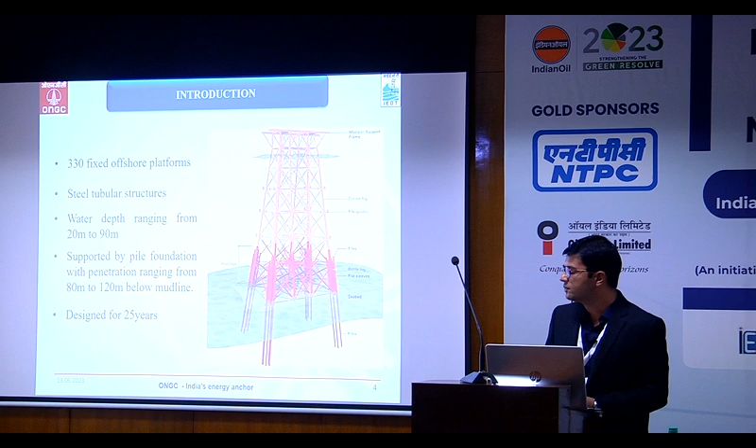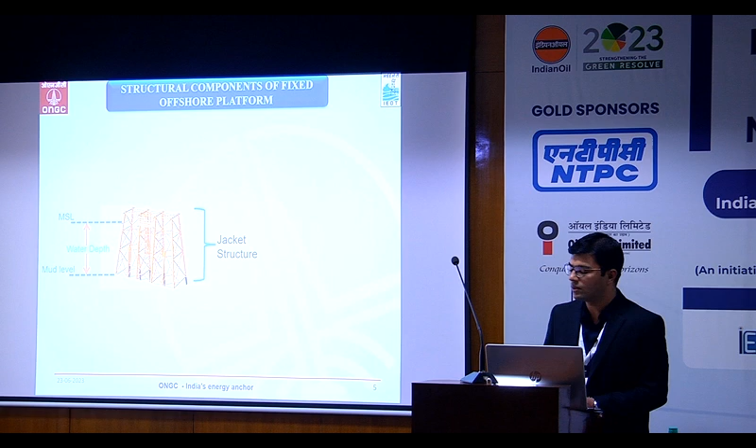Fixed offshore platforms are having three main components. The first one is the jacket structure, which is placed on the seabed. The second one is pile foundation system driven below the mudline through the jacket legs to achieve the requisite capacity. And the third one is the deck structure, which is placed on the top of the jacket structure. So this is the 3D model of offshore platform generated using SACS software. These jacket structures are designed for 100-year extreme storm conditions.

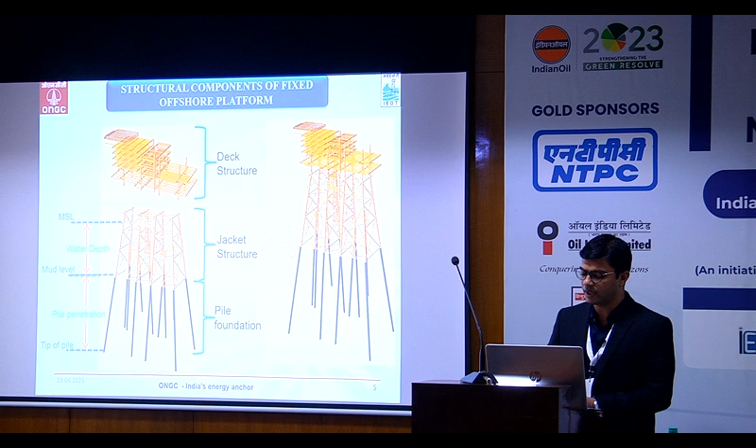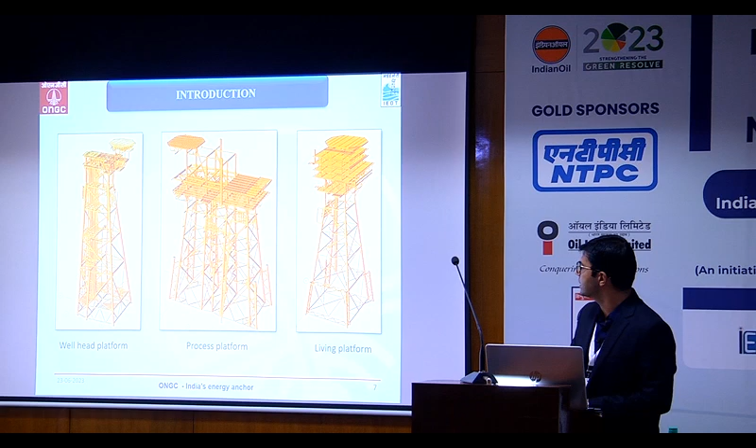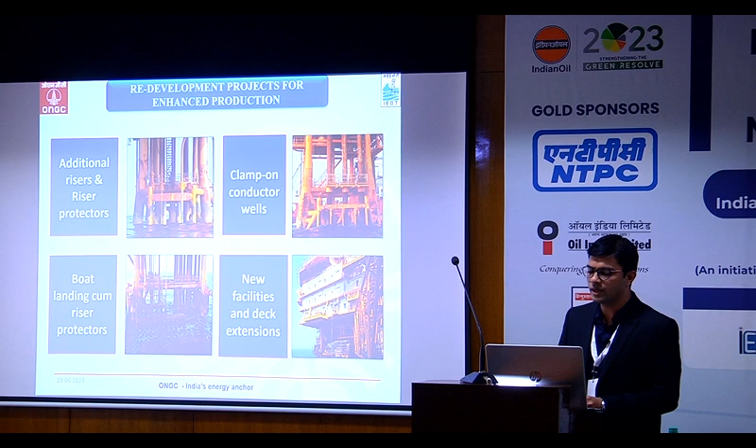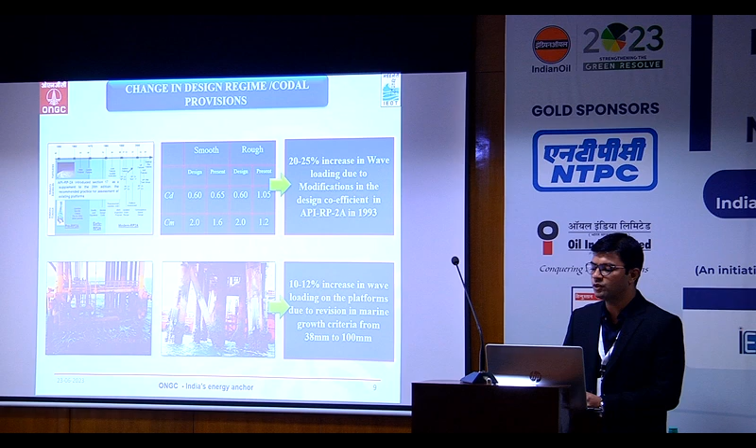Not only this, many of ONGC platforms were designed in 70s, 80s, 90s with codes prevailing at the time of their design. With time, many changes have occurred in codal provisions. There are upward revisions in Cd/Cm parameters, design marine growth, which resulted in substantial lateral loading to the structure. Ultimately, all these factors, whether change in codal provisions or additional loading on the structure, resulted in higher hydrodynamic and gravity loads to the platforms. Therefore, assessment of these platforms needs to be carried out for documenting the structural integrity to obtain consent to operate or fit for purpose certification from the regulatory authorities.

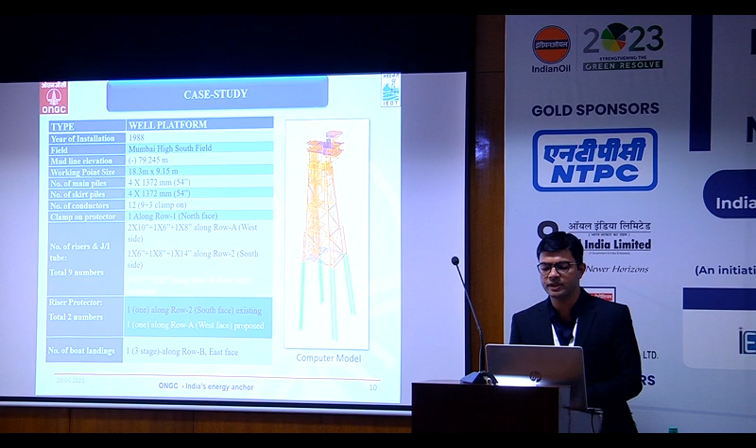Let us take a case study for understanding purpose. A platform situated in Western offshore was referred to IEOT for installation of additional facilities such as 2 additional risers and 1 riser protector. This platform was installed in year 1988 and situated in water depth approximately 80 meters. So we have developed the structural model of this platform based on the available drawings and modeled all the loading conditions. A global static in-place analysis has been carried out for 100-year return period for eight directions of wave, wind, current, along with other design loads using SACS software as per API.

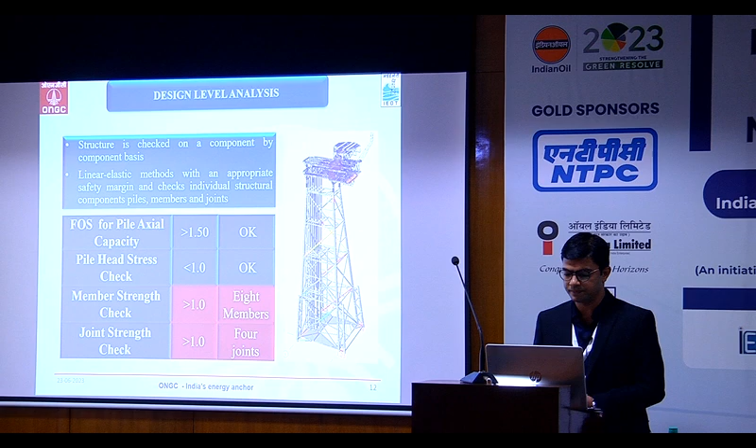The result of pile soil interaction shows that all pile foundations are having factor of safety more than the minimum required value of 1.50 for pile axial load transfer under compression and tension conditions. Pile material utilization ratio of all the pile foundations is also within the permissible limit. However, the member and joint check shows that 8 structural members and 4 joints are found overstressed. These members and joints are having UC ratio more than the permissible limit of 1.

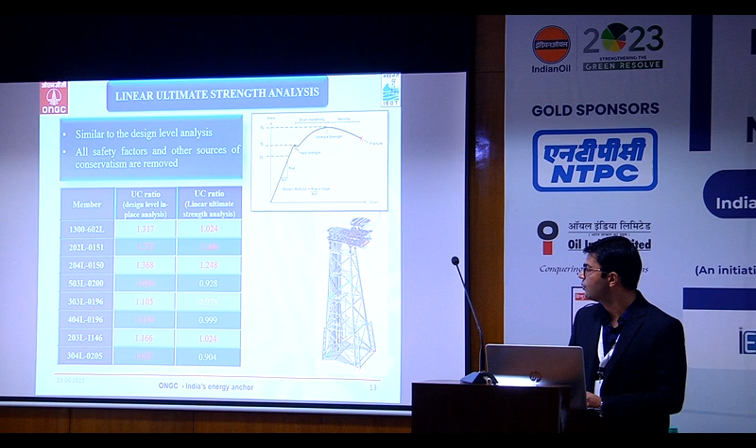Therefore, the members and joints which are not meeting the SIA requirement in design level analysis are checked in linear ultimate strength analysis. This analysis is similar to the design level, except all the safety factors and other sources of conservatism are removed. In linear ultimate analysis, stresses in the members are allowed up to the yield strength. With this, analysis reveals that out of 8 members which were failing in design level, now only 4 members are showing overstressing.

As the structural adequacy of jacket structure could not be documented even in linear ultimate strength analysis, global non-linear ultimate strength analysis is required to be carried out to understand the failure mechanism of the structure. This analysis provides an assessment of global platform capacity instead of the component level check. The ultimate strength of the platform is determined by applying incremental load to the platform until the collapse of the structure. The level of environmental loading that the structure can withstand before the global collapse is then compared to the target RSR. RSR is the ratio of lateral load carrying capacity of the platform versus lateral load generated due to 100-year environmental force on this platform.

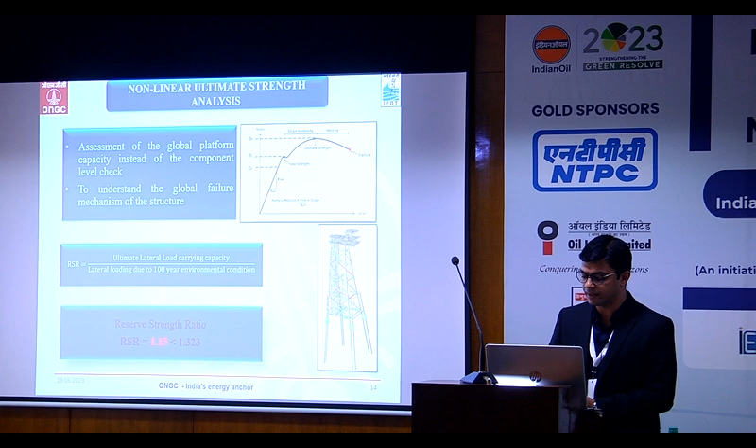The analysis results reveal that RSR value of this platform is 1.15, which is still less than the target RSR of the platform. Hence, SIA of this platform could not be documented. In view of this, to document the SIA of jacket structure, there is a need of load reduction by identification of some unused redundant facilities. Hence, some redundant facilities like this riser and some caisson are identified for removal. Now, we have carried out the analysis, and again the RSR is slightly higher but still less than the target RSR.

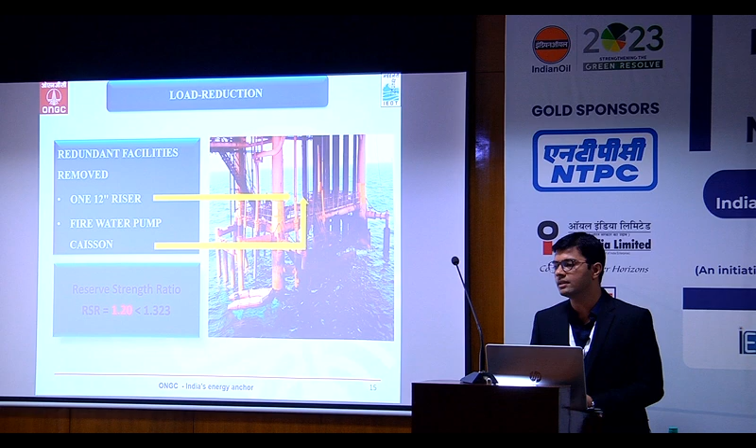So, we have checked the inherent capacity of the platform, like there are 12 number of 30-inch diameter conductors having 1-inch wall thickness present on the platform, driven to the depth of 70 meters below the mud line. These are the 12 conductors. So, API allows us to consider the lateral stiffness of these conductors in non-linear ultimate strength analysis. Reanalysis has been carried out considering these conductors as piles in order to provide additional lateral resistance to the platform along with the earlier identified load reduction measures.

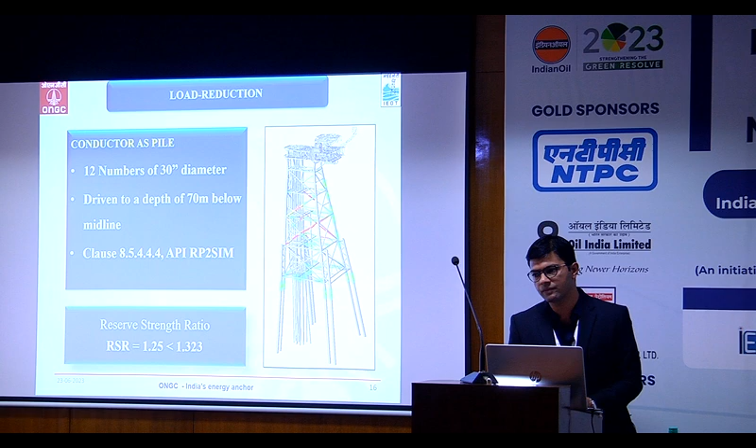Now, the RSR is 1.25, but still less than the required value. So, global failure mechanism of platform shows that some of the vertical braces, these braces, are showing overstressing beyond the RSR value of 1.25. So, they require strengthening. So, for analysis purpose, these critical members have been considered as grouted with high strength cement and equivalent thickness has been modeled. The analysis results reveal that RSR is now more than the target RSR.

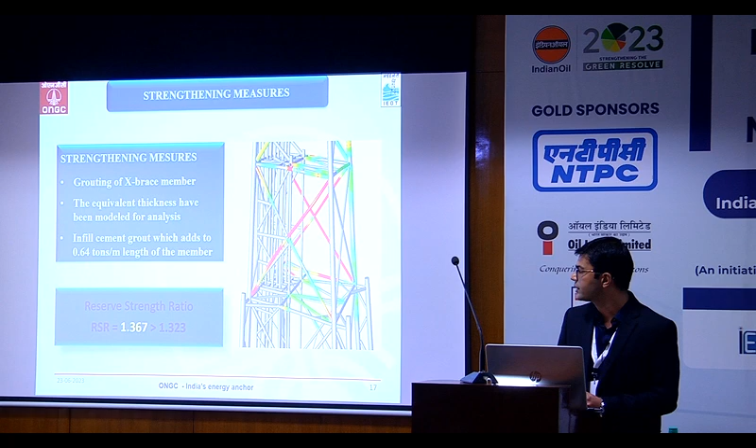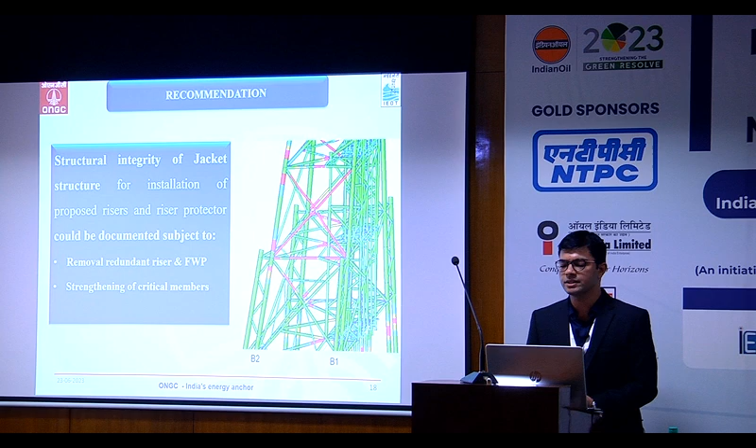Finally, SIA of jacket structure could be documented for installation of proposed facilities in non-linear ultimate strength analysis subject to strengthening of critical members. That is how IEOT is carrying out SIA studies for ONGC's operational requirements and serving the nation. Thank you. Thank you very much.